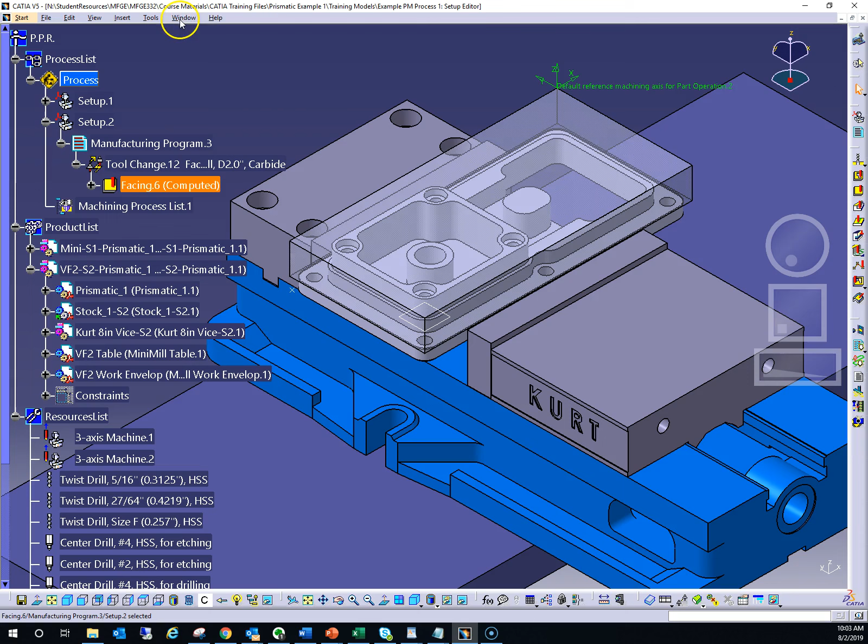The next operation that we're going to do is a profiling operation. So if we look at what that might look like, this here shows you can see in green here what we want the surface we want to generate. In other words, we're trying to remove material on the outside of this using a profiling operation.

So there are a couple of things to bear in mind when you do a profiling operation. We've talked about this in an earlier video. I'm going to go ahead and hide that green surface. I'm also going to hide the stock temporarily.

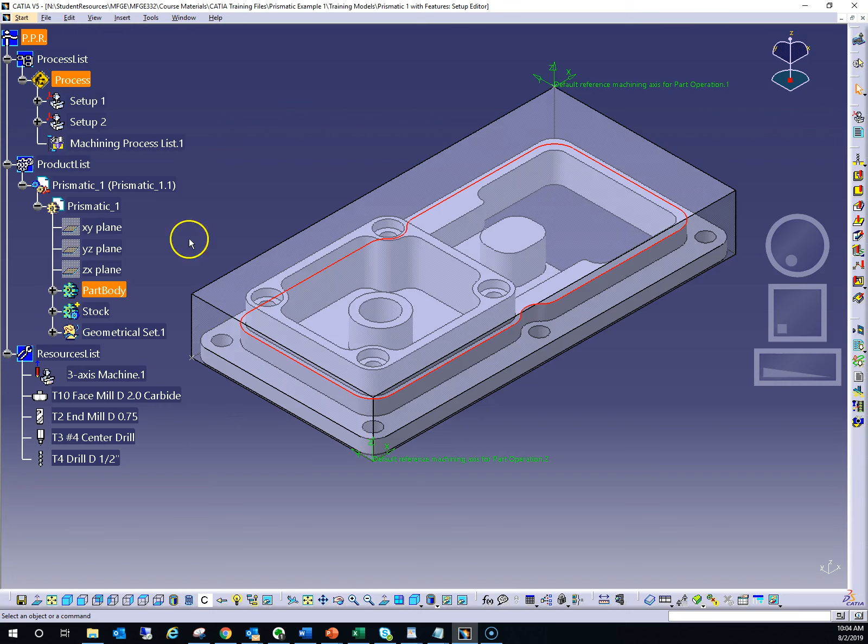One of the things we mentioned is we need to look at areas where the cutter goes into a concave region to make sure that the cutter radius is appropriate. So we use the measure tools here to measure. This tells us that we have a radius of 0.436. So a cutter diameter of 3/4 of an inch would work in there.

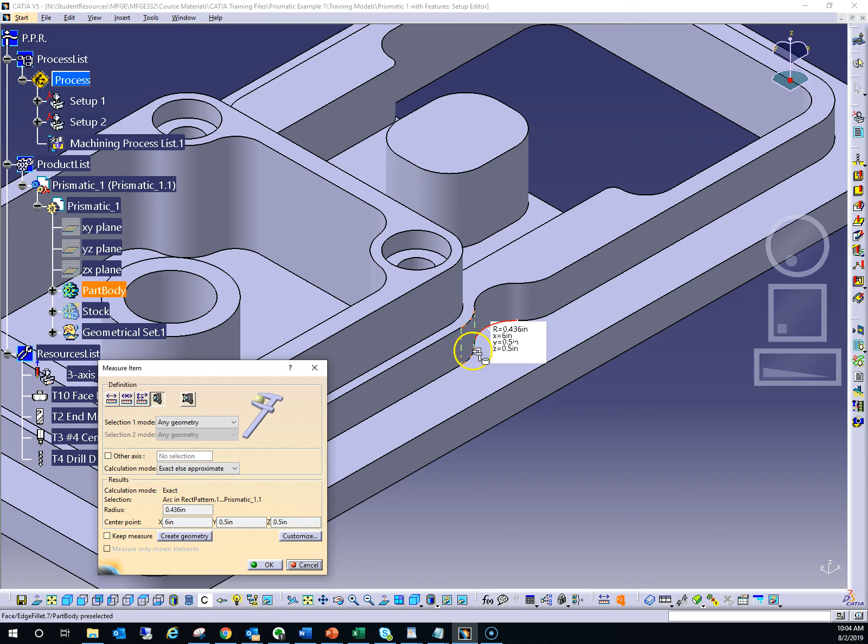The other thing we want to pay attention to is how much material do we have this way, because we're not going to be able to take all this material in a single cut. We have to use multiple radial passes. So I'm going to measure the distance between this face and this face, and it tells me that that's 5/8 of an inch, or 0.625 distance.

So that gives me a little bit of information about the size of the tool, and also too, for my machining toolpath strategy, how much of a step over can I take, and maybe how many passes do I need to take radially to remove that material.

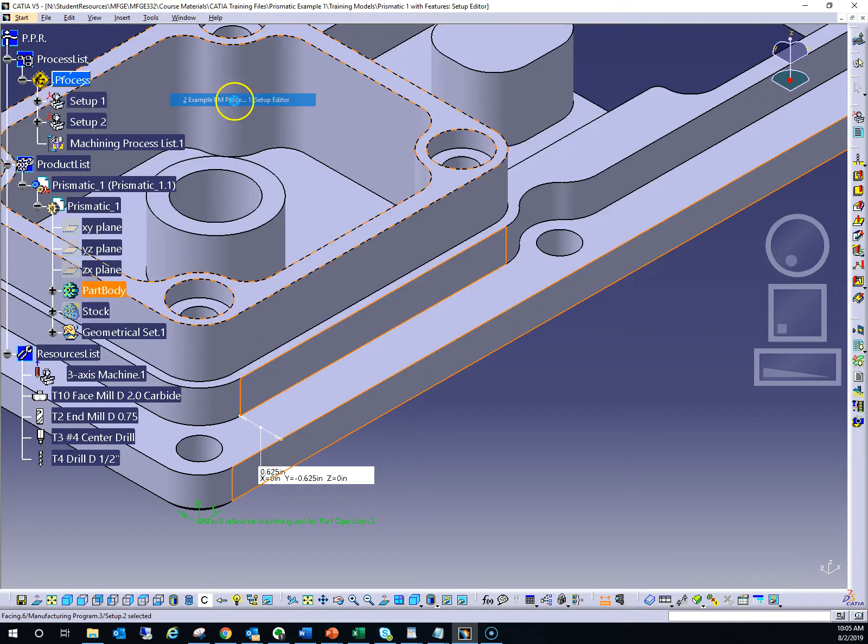Okay, so with that, we're going to go to our setup, and we're going to just jump right into this. I'm actually going to let you go ahead and do this as an exercise first, since you've already done a profiling operation in the first setup.

So here is what we did for the first setup. Using the same parameters, the same cutting tool. In the first setup, if you recall, we used a 3/4 inch end mill. So we're going to work with a 3/4 inch end mill, of course, that will work in the corners. So using the same tool, the same approaches and retracts, and also the same speeds and feeds and toolpath strategy.

So I'll let you take a shot at this first, and then we'll come back and you can look at how I've done it, and you probably need to make some changes to some of your choices once you've done that.

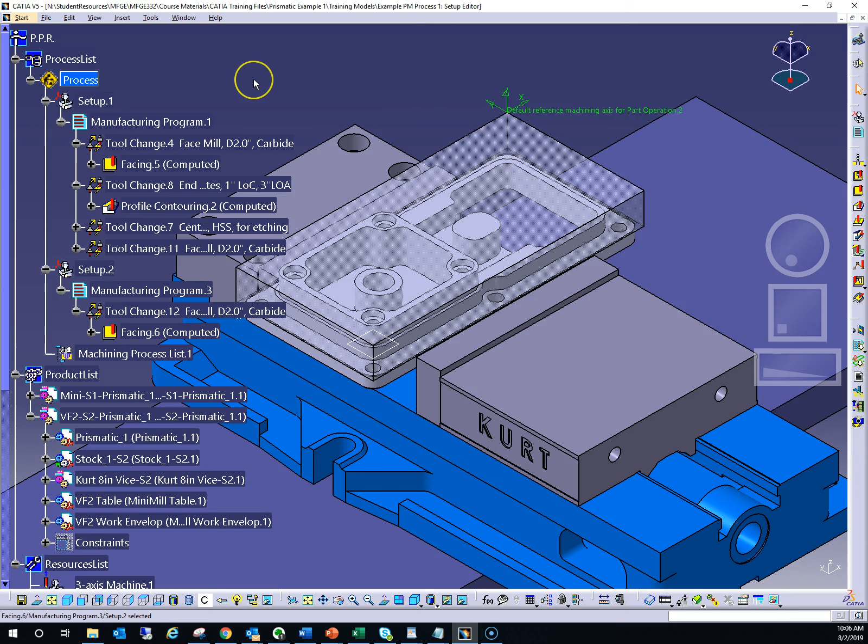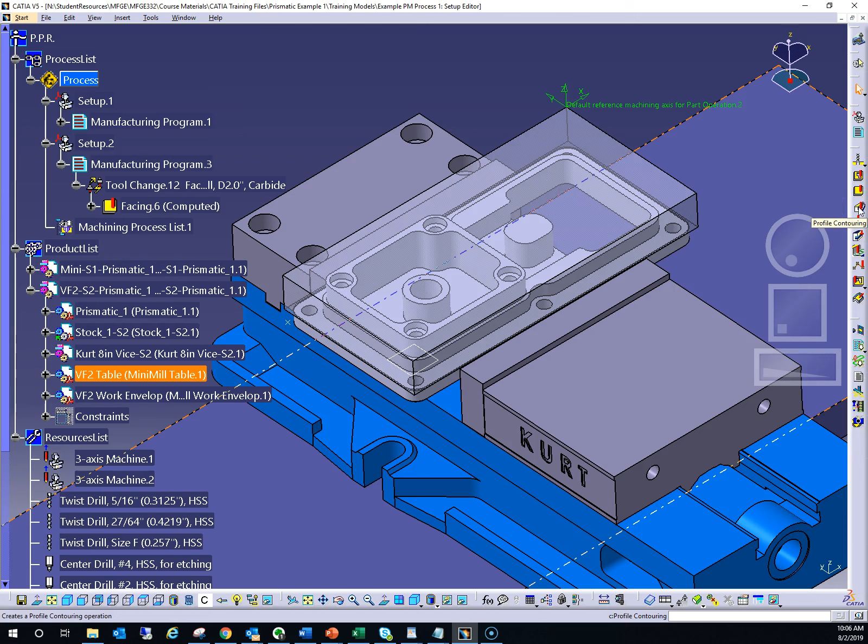Okay, so hopefully that went well for you. Let's go ahead and step through the process of adding that operation. Again, we're going to add it to our second setup. So we go over here to our operations toolbar, and we select profile contouring, and we add it below the facing operation.

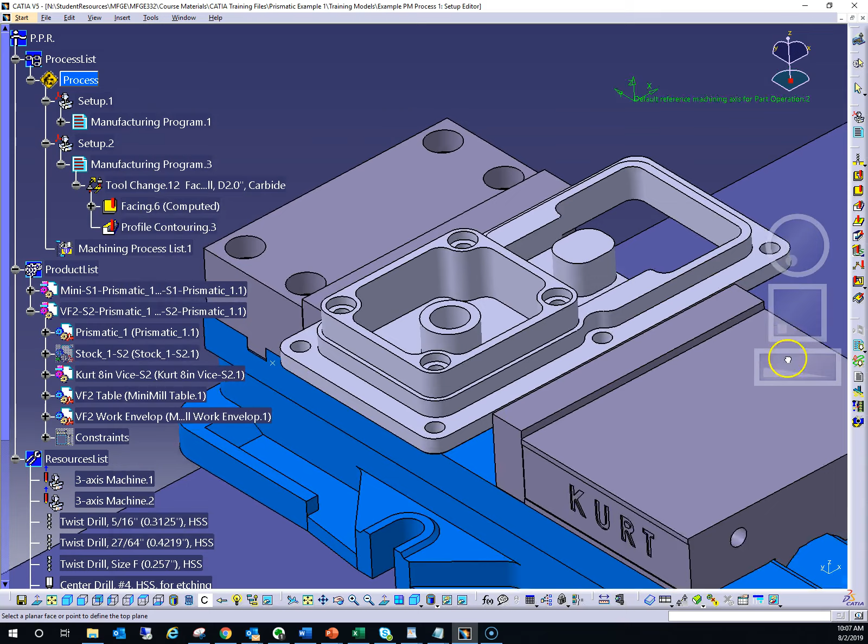The first step is to go ahead and define the geometry. So to do this, I'm going to hide the stock because I don't really need the stock, at least not initially. So let's go ahead and hide this. The first thing we pick is, where does the tool first hit material? Remember, we faced off material down to this surface, so this is where the tool will first make contact.

And then we want to go ahead and select the guiding elements. That tells us what the profile is that we want to machine to. So let's go ahead and select this. And again, I'm going to use the edge selection tool.

So if you remember the edge selection toolbar here, we can go ahead and select an edge. And previously I showed you that once you select an edge, you have some of these tools that help you select a loop or multiple edges. So in this case, I want to use the option to navigate on edges until an edge. And then if I look at this arrow here, it says that CATIA is going to go around. It's going to actually select edges in a clockwise direction.

So let's go ahead and select this edge here. My hope is that CATIA will be smart enough to loop all the way around and come back to this edge here. So let's see what happens. It looks like it got to this point here, so it didn't quite get all the way around. It got confused at this point here. So let's repeat this and see if we can get back here. I'm going to click on this again, and hopefully I can extend the selection all the way through.

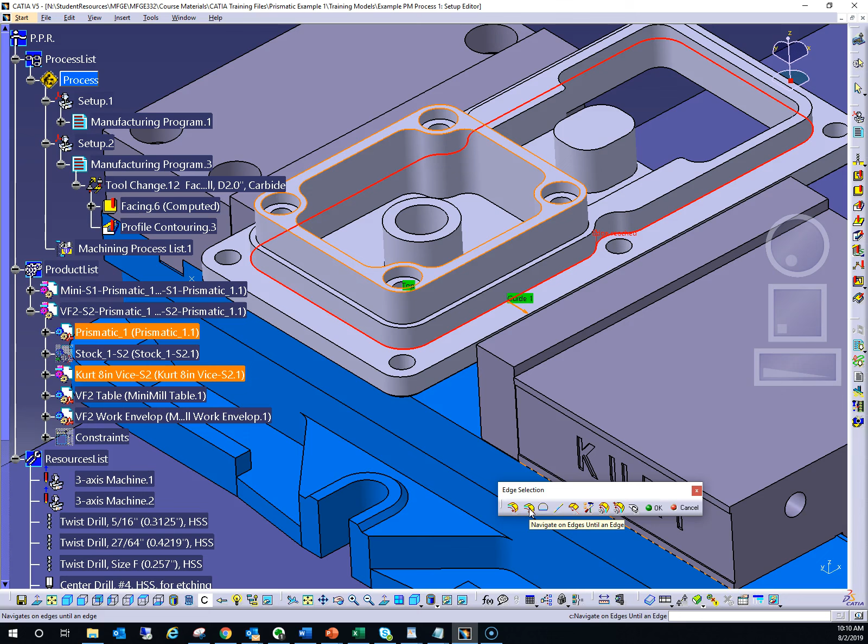So there you see I can very quickly pick a lot of edges without having to go through and manually picking each edge individually by using this navigate on edges until an edge. So let's hit OK. We now have our guiding elements picked.

Let's go ahead now and pick the bottom. This is a pocket profile that has a bottom, so the tool will ride on the surface. Let's select that as our bottom. And these are limiting surfaces - again, we don't have any limiting surfaces since it's a full circuit that the cutter is going to do. Okay, so this is our geometry.

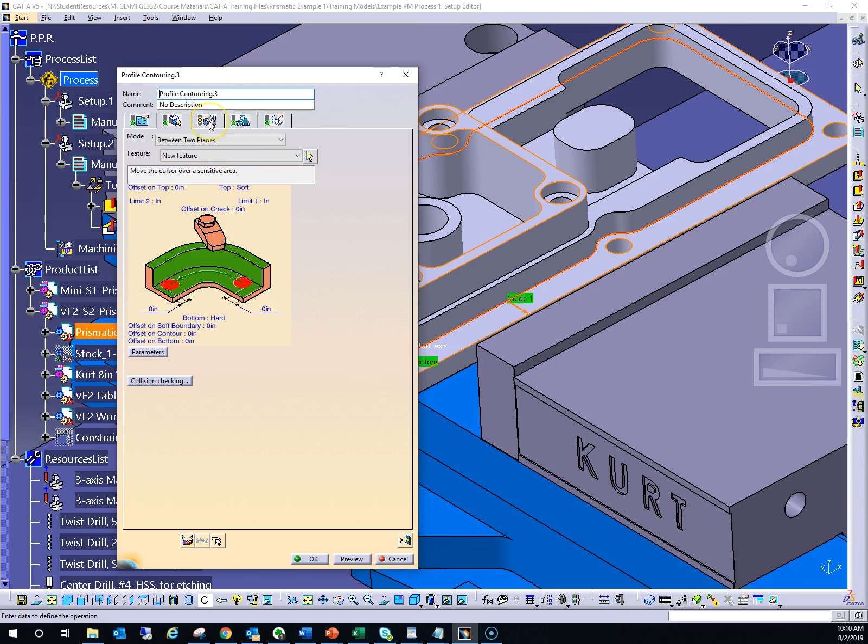Let's go to the third tab. It looks like CATIA is trying to use the facing cutter. Of course, that's not correct. So let's go ahead and change the tool that we want to use.

So let's select the tool from the document. In this case, we're going to use the 1/2 inch carbide three fluted end mill, which is the same tool that we used in the first setup. So let's go ahead and select that.

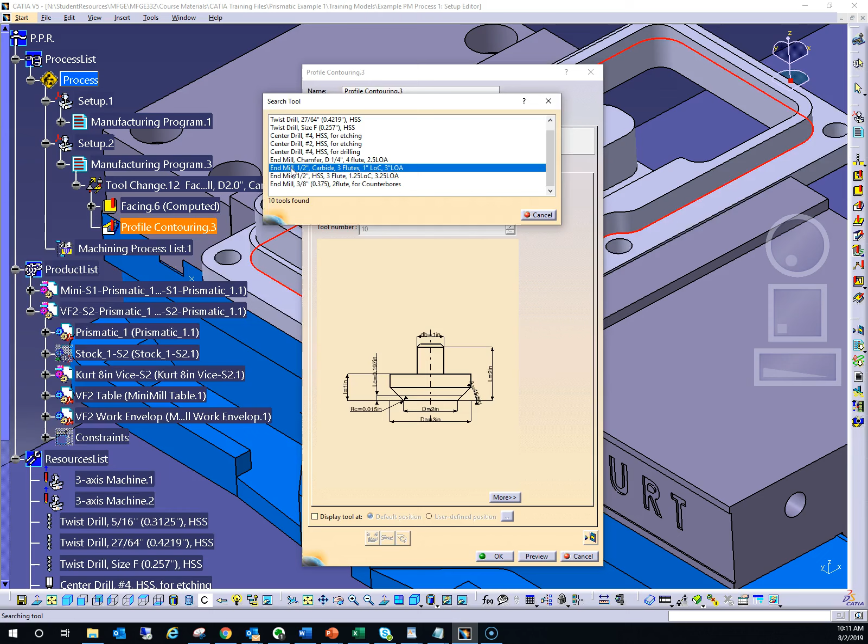We can see that in selecting that tool, CATIA actually took that profiling operation, which was previously being machined as part of the facing cutter tool change. It inserted a new tool change for that end mill, and now it's added the profiling operation under that tool change. So that's our tool selected.

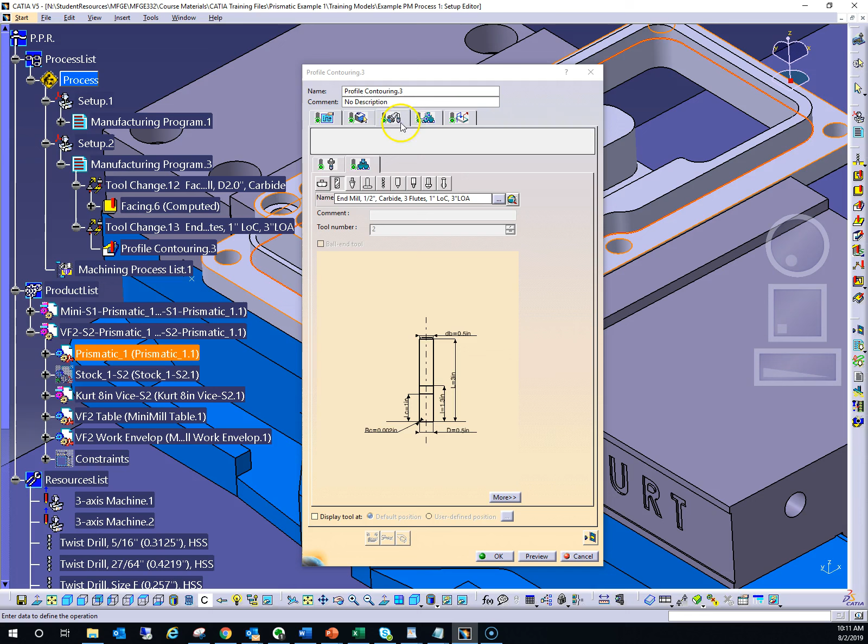Let's go over now to our fourth tab, which is our process parameters. We want to make sure here that we have the right information. So this comes in from the cutting tool, the machining roughing feed rate, which is 120 inches, and our finishing feed rate, which is 20.

The approach and retract look like the values that were set for the facing operation. CATIA remembers these - we're going to stick with those. Then our RPM is 6,000 revolutions per minute, which is what we use for carbide. So these look good. Let's go over to our

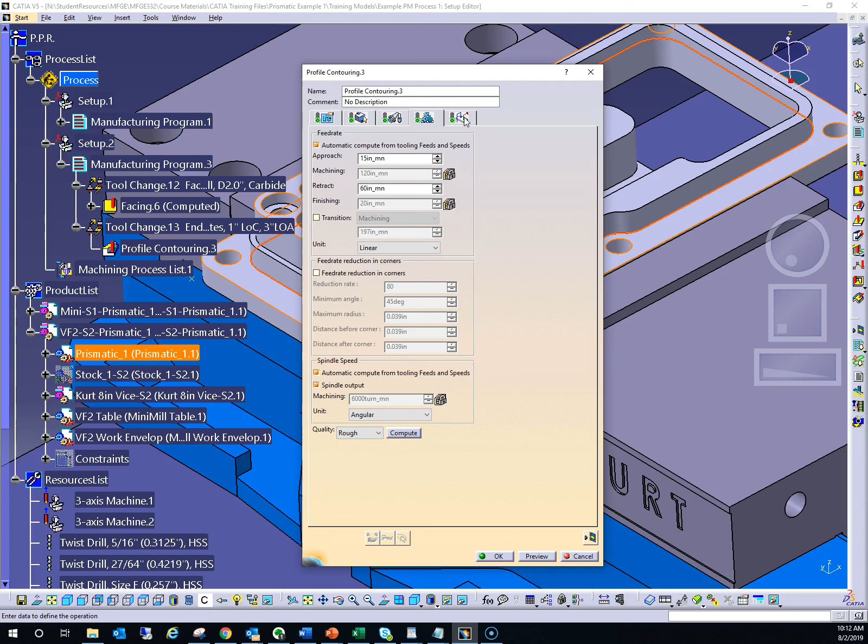Fifth tab, and these are our approaches and retracts. If you recall, in the first profiling operation in setup 1, we used a circular lead-in and an axial move for our approach retract, as well as return between levels because we were stepping down multiple levels to get down to our depth of cut, and we also had a finish pass, retract, and approach. So let's activate these just to remind us that we have to do these.

Let's start with our initial approach. We want to do a circular lead-in and an axial move. This is a move from a plane, so we want to delete this. Let's remove all motions, and let's go ahead and add a circular motion. We left the default radius - again, you can change this if it's too long, make it smaller if you need to.

And then we added an approach move, axial approach move to the start of the circular lead-in. So we use this axial move here, axial motion. Now, if you recall, in the first setup for that profiling operation, we used 0.125 as our axial. Again, the rule of thumb is that you should use an approach motion axially that is slightly greater than the depth of cut. For the profiling operation in the second setup, we're probably going to have to take fairly large radial passes.

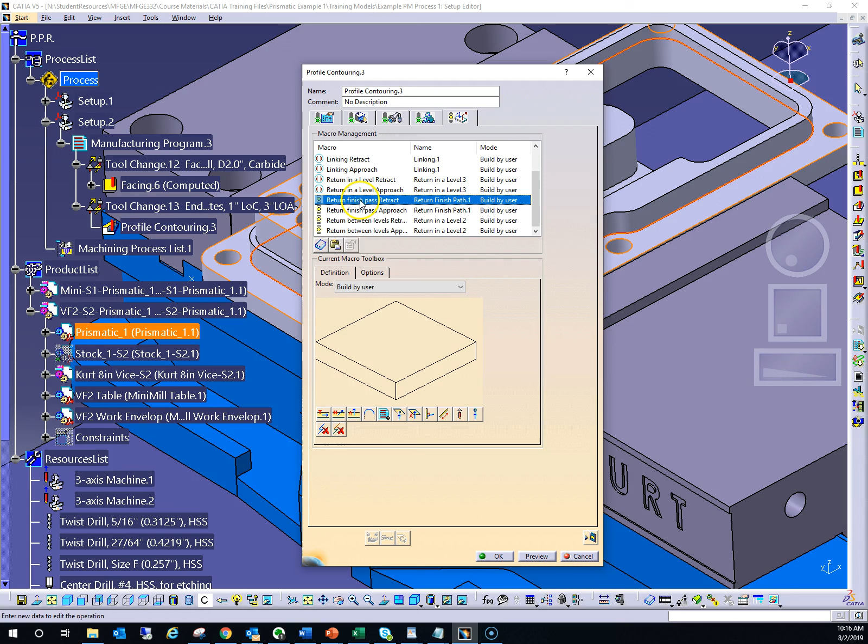So that's our approach, and we're going to just do the same thing for the retract. We're going to delete what's there, add a circular, add an axial, and then double click and make this 75 thousandths. Again, we can come back and change these if they do not look to be correct. Let's just repeat this for the finish pass retract, the approach, and then the return between the levels retract, and the return between levels approach.

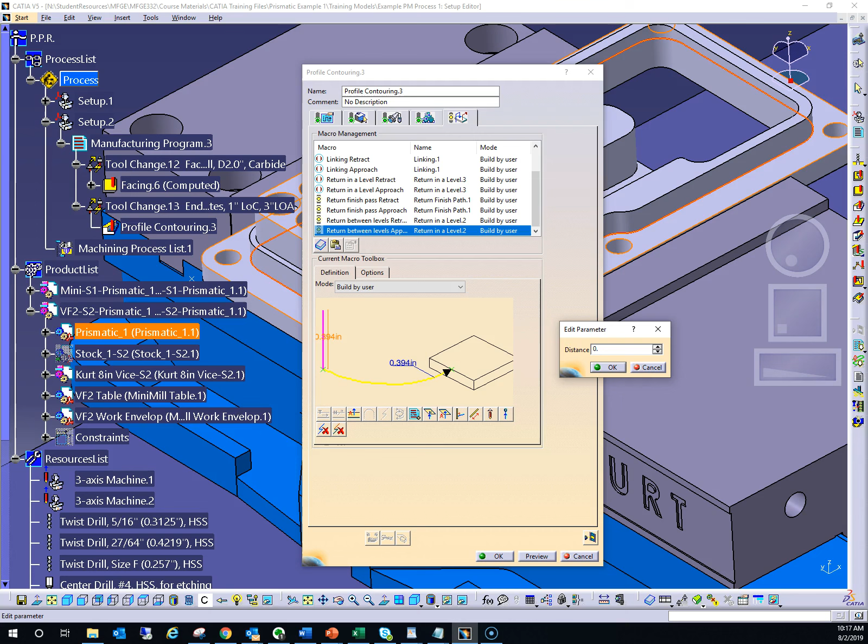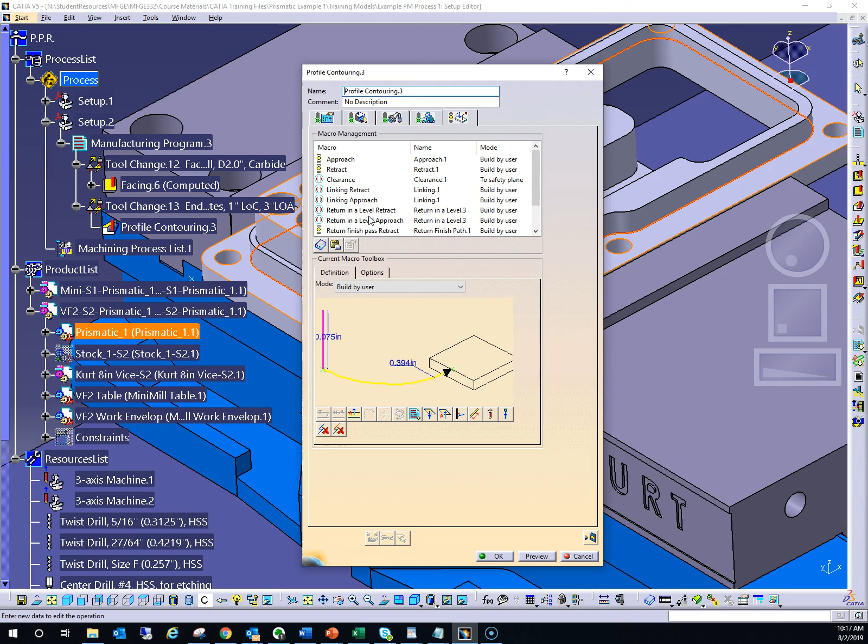Okay, so we have the initial approach retract, and we've activated 2 other pairs. We may have to also do something else on here, but let's move ahead first. We can always come back and add these later once we see what the tool is doing as it engages the material. So let's jump now over to the first tab.

In here we're going to use a one-way strategy as we did in the first setup. We're going to leave the direction climb, type of contour circular, which is going around corners. Again, we don't have sharp corners here, because they are rounds on the corners and fillets.

If we look at these options here, we do want to close the toolpath. So let's close it, and let's do a little bit of an overlap, 50% of the tool. That's fine. The remaining options are not important here.

For step over, remember there are 2 types: radial and axial. For the radial step over, the question mark will explain what this means. We have a question here of how many paths do we want to use. So remember, when we measure the distance between this face and this face, we found it to be 5/8 of an inch. And if you recall our cutter diameter, we're using a 1/2 inch cutter.

So there's no way we can take this in one radial pass. And even if we could, we may not want to, because of the cutter load. So we need at least 2 passes here. This question mark shows you. So let's bump this up to 2. And then the distance between passes, since we have a 1/2 inch cutter, let's go with 50% radial engagement, so let's use 0.25.

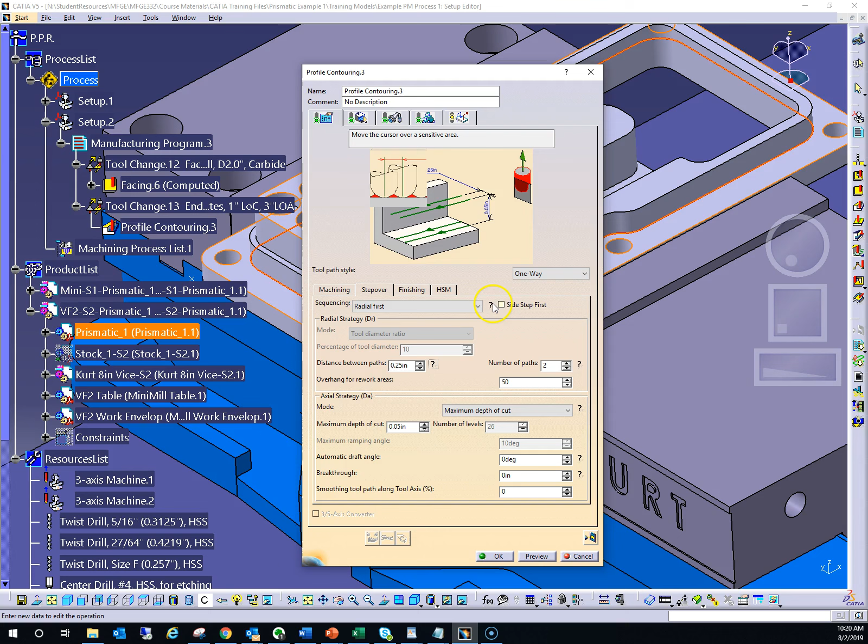And then we want to adjust our axial. So this is how the tool changes depth. Again, the sequencing here, just to recap, I stepped over this. The question mark shows you that we're going to go radial first, so we're going to cut 1, move to 2, then 3, 4, 5, 6. So this was set correct.

So for our axial strategy, we want to go maximum depth of cut of 50 thousandths, and this tells you the number of levels. So CATIA calculated the number of levels given the distance from the top of the profile geometry to the bottom. So it's quite a few levels that have to be cut at 50 thousandths to get where we want to get.

So these other options here are not important for what we're trying to do. Let's go over to the third tab. We want to add a finishing pass at the last level and bottom.

So what this means is that we're not going to finish each level. Remember, we have 26 levels, so it would mean a finishing pass would be added to each one of those 26 levels if we were to do side finish at each level and bottom. We just want to do a finishing pass on the side when the tool is at its lowest level, and then also to finish the bottom too.

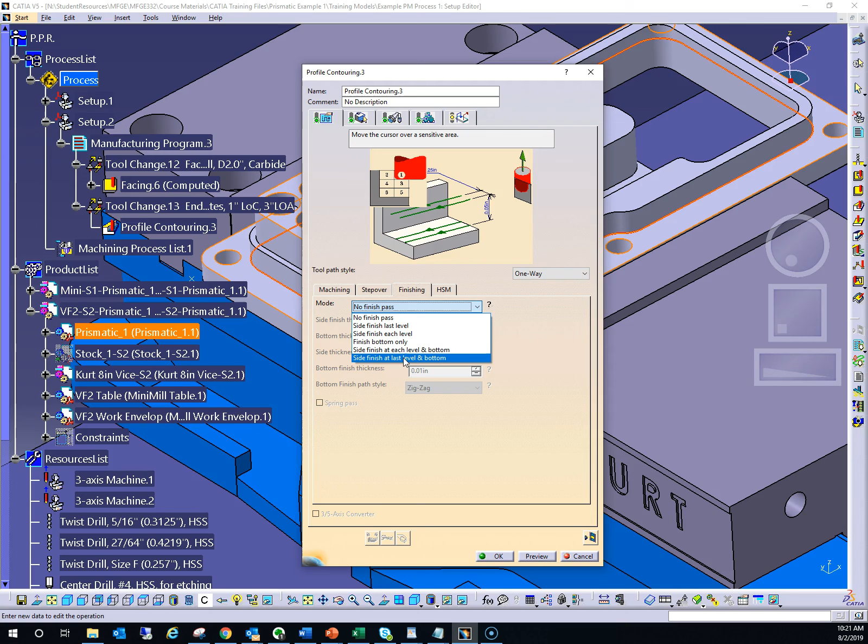And we want to have a side finish thickness. Again, the question mark shows you what this is, so this is how much we're leaving. And we're going to set this to 10 thousandths.

Some of these options here are for other things you might want to do, but the one we want to set is the bottom finish thickness, the top one and the bottom one, and that's already at 0.01 or 10 thousandths. Okay, so let's go ahead and generate our tool paths.

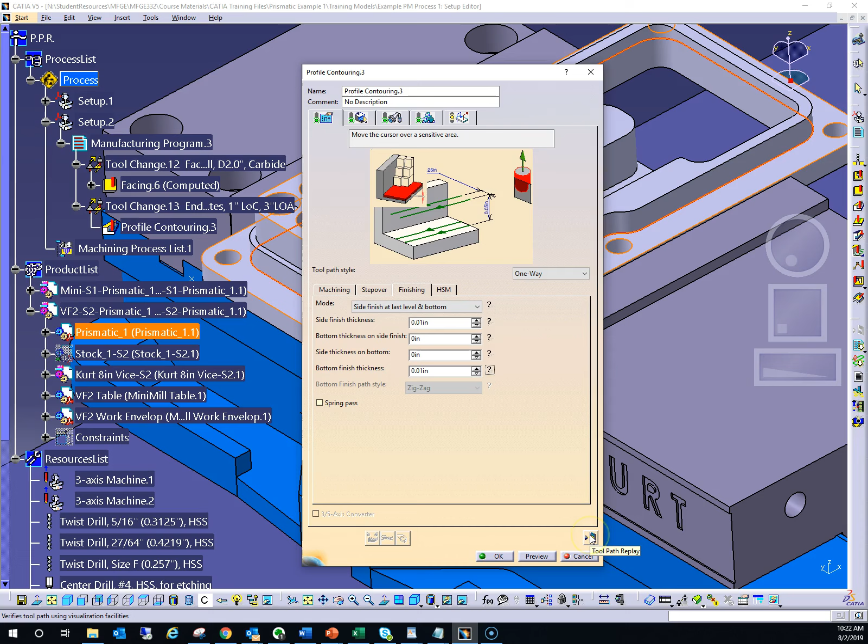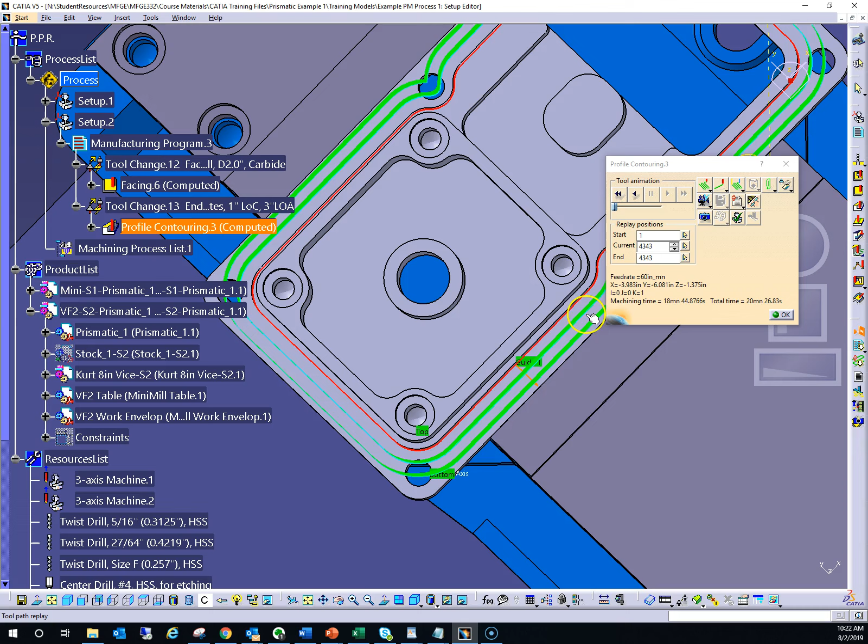And there we go. So what you can see here is that the cutter is taking 2 radial passes. The cutter starts on the outside, and then it moves inwards to the next pass. And once it's got these 2 passes done at each level, it drops downwards.

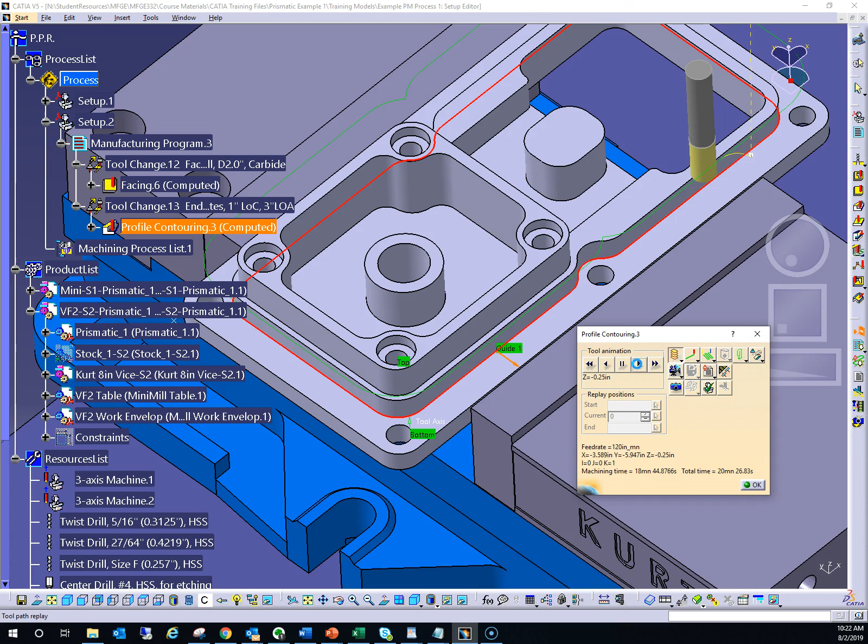If you change your toolpath display option to plane by plane, and then rewind, you can see clearly what's happening on each level. So as we step through, we're now seeing what each level does. This here shows you the initial approach from tool change, this dashed line, tool stops at 75 thousandths. Remember we set our axial approach in our macro to 75 thousandths.

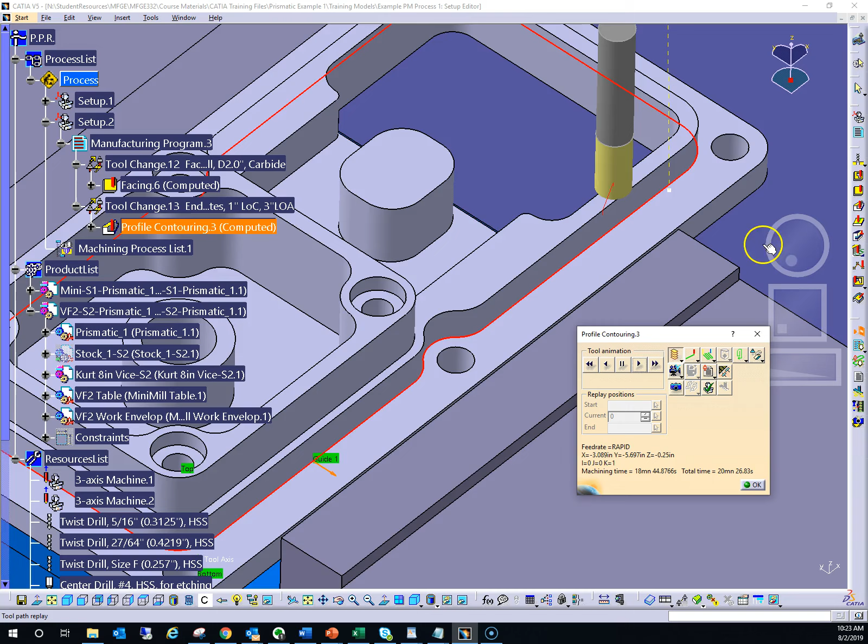So it approaches at the approach rate, and then it moves into a circular lead-in. Then the green is the actual machining at the machining feed rate. So that's the first level. Then once the tool gets to the end of the first pass, it now repositions to do the pass that's closest to the final wall that we want.

So the tool rapids up, rapids over, and rapids down. Now this is a little bit concerning, and we may want to tweak this in a little bit, as I will show you. But let's continue. So now the tool completes that inner pass. So it runs all the way around the second pass.

The tool comes out, so this is the retract move. And now it repositions down to the next level. So this is the tool retracting, rapiding, and now dropping down to the level that's 50 thousandths below the first. And then pretty much it repeats. So here's the lead-in again. The circular lead-in runs around the part.

Then it repositions to the second pass radially, the one that's closest to the wall. And then it does that pass, comes out. So this is the retract between levels, because this is how it gets to the next level. It comes out, it retracts 75 thousandths, rapids over, rapids down, and engages 75 thousandths.

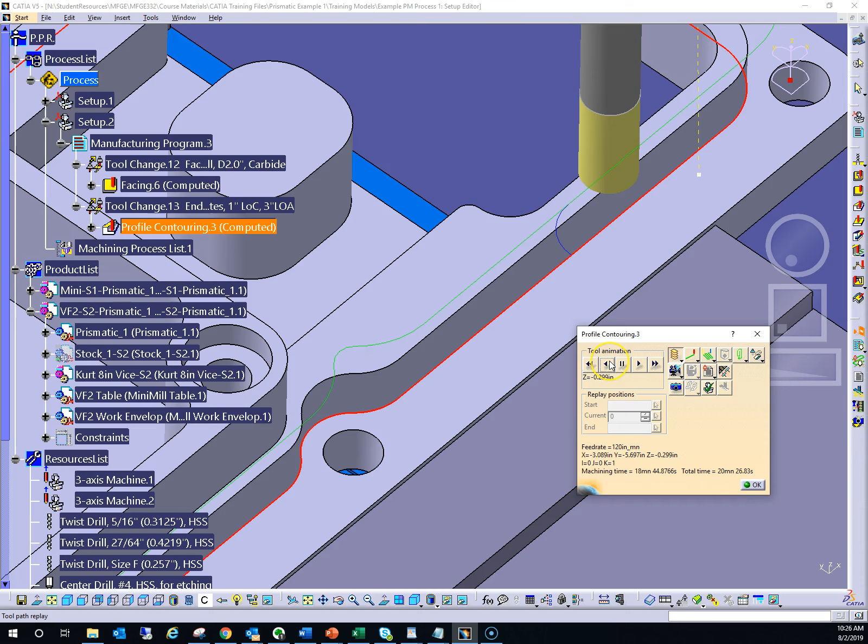So again, I strongly recommend you use this plane by plane option to look at what's going on. This is the way you visualize how the tool is removing material at each level. Now I'm going to step back a bit because there was an issue here, which shows how the tool repositions between the outer radial pass and the inner radial pass. Remember that we've set it to be 2, and this is done totally using rapids.

So this is a little bit concerning. Anytime you rapid up and then rapid down, and notice that there isn't any yellow here. So the tool is rapiding down to this toolpath. So that's of course a danger sign. Anytime the rapid stops on your green means that the tool is rapiding into material down to your depth of cut. So we need to fix this. So the question is, what macro or what lead-in or approach and retract impacts the tool as it moves between parts of the toolpath at the same level.

So let's hit OK, and let's go back to our 5th tab. And it's probably one of these options here that has not been set. So if we look at these options here, we see that there's something called return in a level retract, return in a level approach. And what this means is, how does the tool approach when it moves from one piece of the toolpath at the same level to another piece of the toolpath at the same level. So we want to activate these two, and again they activate as a pair.

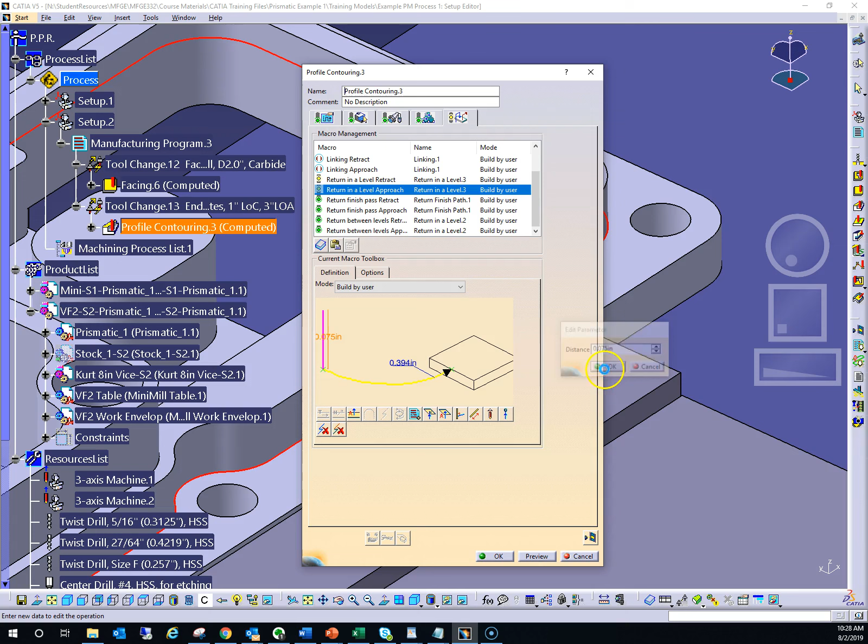And let's go ahead and just set these to be the same as we did for the return between the levels, which is we had a circular lead-in and then an axial motion that is greater than the depth of cut, so 75 thousandths. And then let's do the same thing for our retract. And let's look at what impact that had. So now that we've added these, let's go ahead and regenerate our toolpaths.

So it looks a lot busier in here. And let's rewind to the start, and let's step through. Make sure that you're on plane by plane replay. So again, this is the first approach. So this is the outer pass. So we come around and then we retract. And now the tool is going to reposition for the inner pass. So that's the one that's closest to the wall.

And we see now that instead of it being fully red, we now have a blue retract. We have a red rapid, and now we have this yellow here, which tells us that the tool is moving downwards at the approach feed rate. And now we see for the inner pass, we now have this yellow approach, which we didn't have before. And the tool then moves around in a clockwise direction and then comes off.

So this is basically what's happening on the first level, 50 thousandths down. This first pass on the outside radial, and then we step in, we complete this, step in, and then do the pass that's closest to the surface that's being machined.

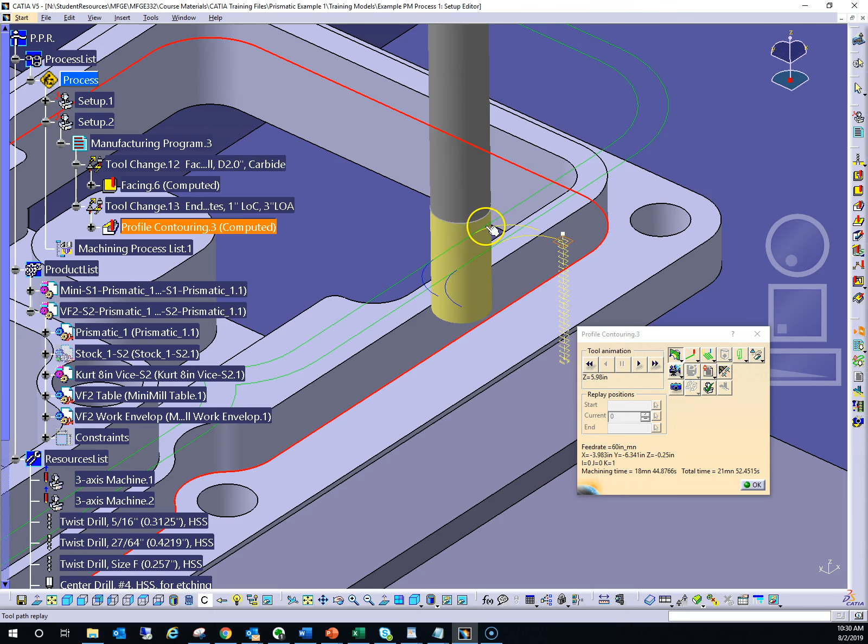The other thing that you may want to check is the finish pass. So another display option that's really useful, instead of the plane by plane, you can come down here to the bottom and look at what's called sectioning of tool paths. So let's click on this. And what you see displayed here are all the levels that tool paths have been generated on. And by clicking on one of these levels, you actually see all the tool paths on each level. So again, you can see the two passes, the lead-in in yellow and the lead-out or retract in blue.

So what we want to do is look at the last level, because the last level, of course, would be our finishing pass, just to confirm that we have the correct lead-in and lead-out. So if we click on that very last yellow plane here, we have our yellow lead-in to the light blue. The tool comes off, and then it lifts up and repositions over here for the second pass and completes the second pass.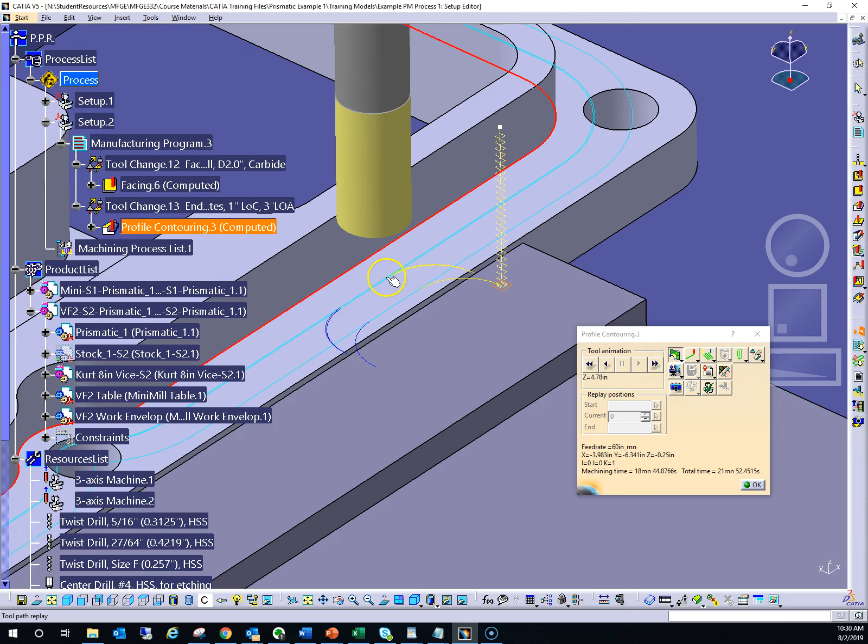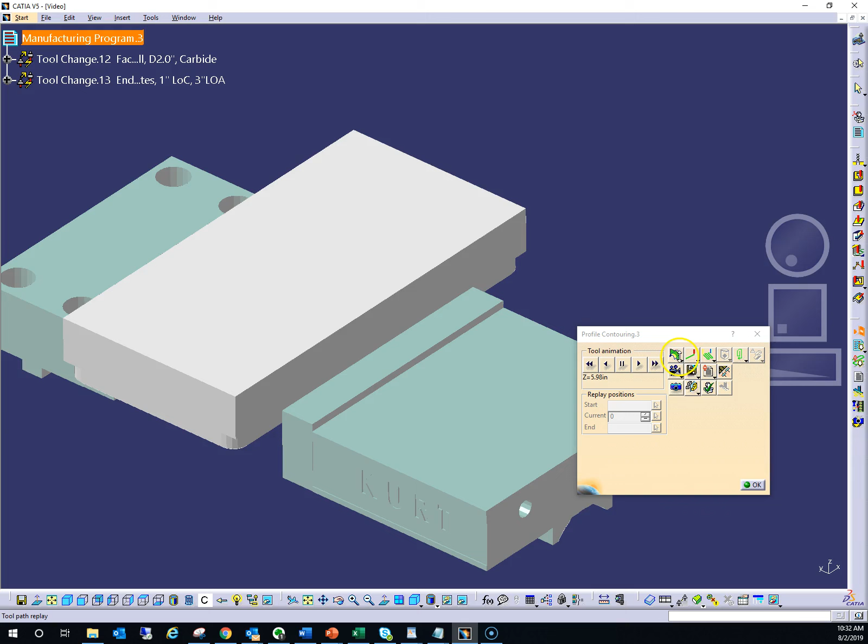Okay, and we have, of course, the option to do our replay using material removal simulation. And this might be important to check and make sure we're not leaving any material in the corners. So let's go ahead and run this. Sorry, we have to switch this to continuous playback. So there's our facing operation. So we are in fact leaving material in the corner, which is something that we're going to have to deal with. So there we go. We're also leaving material here.

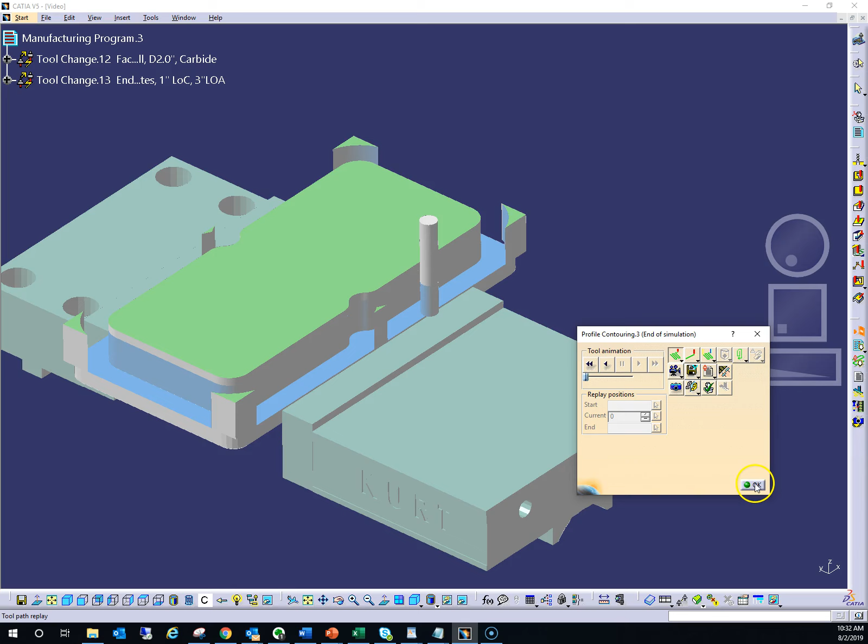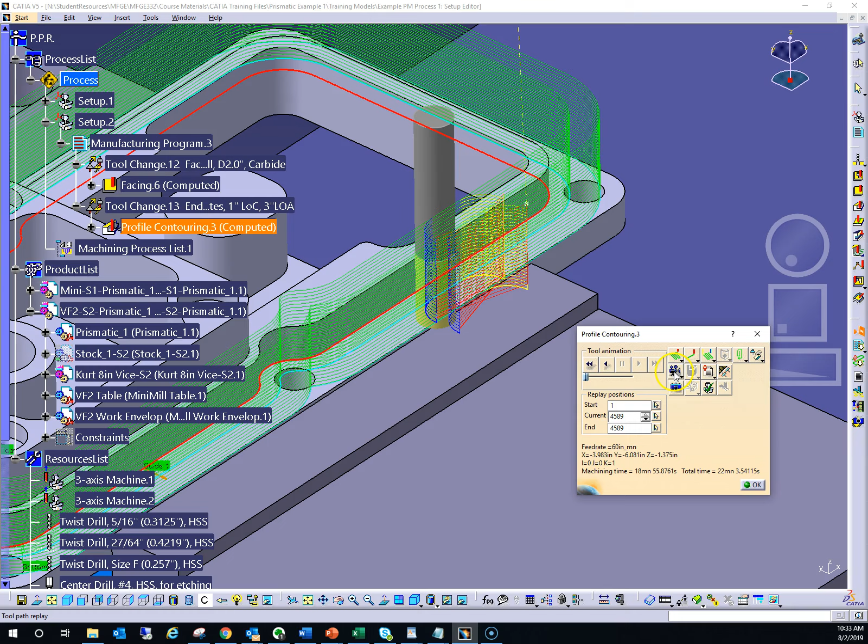So there are a couple of strategies one can use, and we would probably not get into those fully in this video. But one thing we could do is we could go back to our strategy tab here and change our step over. So remember, we have 0.25, a quarter of an inch between tool paths. So let's say we wanted to increase this outwards to 3/8. Let's go ahead and generate. And let's repeat the material removal simulation. So we removed this, but we're still not quite there on the corners. So that remains an issue.

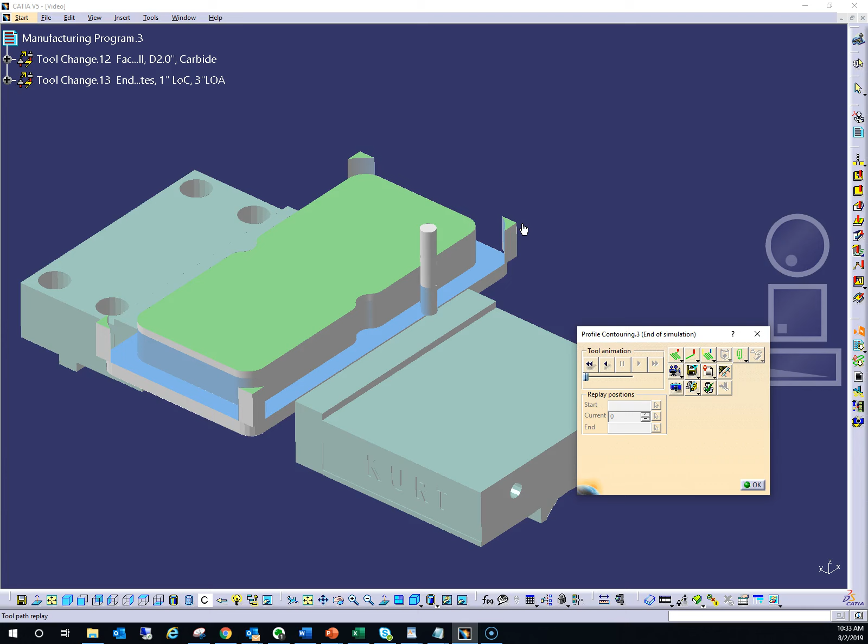So what are the options? Well, one could increase the size of the cutter. So if you went from a half inch to a 3/4 inch, you'd be able to take a wider path, and that could potentially do it. The problem with doing that, though, is that we tend to want to avoid using larger cutters because if you have an accident with them, they tend to do a lot more damage, and they also cost more, of course.

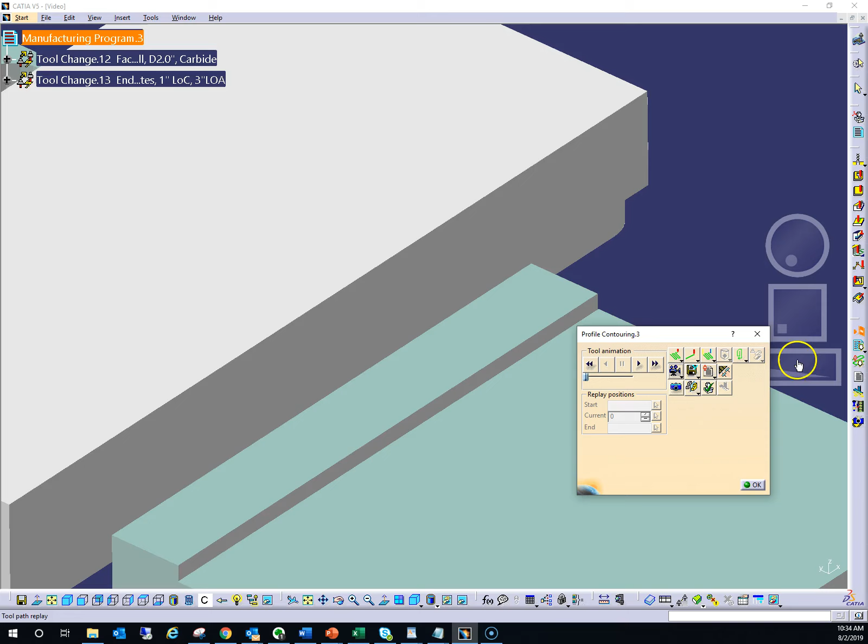The other thing that one can do is one can increase the number of passes. So instead of 2 passes, we can use 3 passes. Let's change this back to a quarter of an inch. So this, of course, is going to increase your time. So now notice that there are 3 passes here instead of 2. Let's look at the simulation. So again, it's still leaving the corner. So let's go ahead and pause this and close, hit OK. And let's go back to 3/8 of an inch.

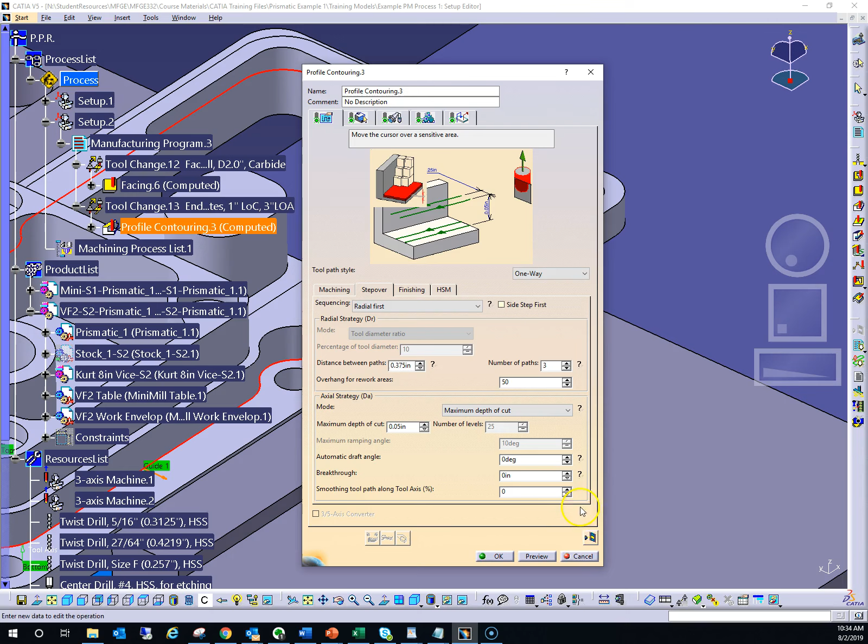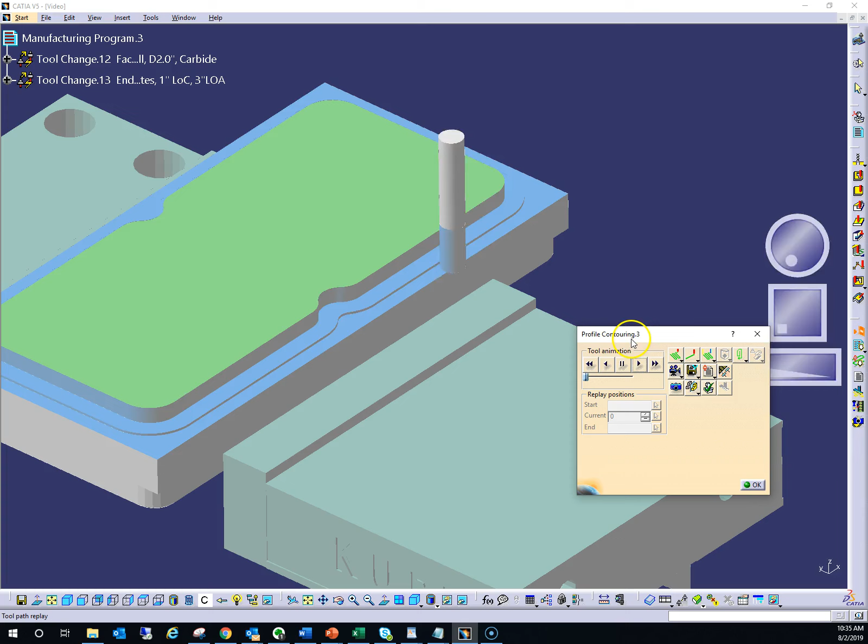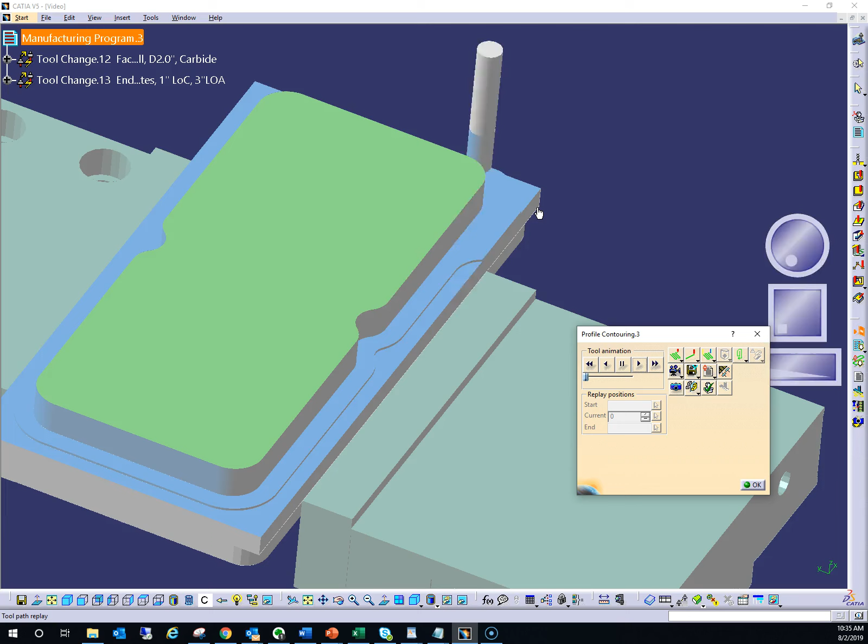So now we are getting the corners, but notice if you look closely, let's just pause this here for a second. Notice that the cutter, as it's going around the first pass, it's hitting the corners correctly, but it's not doing any work here. So this is really inefficient because remember, we're doing this at 25 levels. So while this is certainly going to give you the result, when you talk about your machining time, it's going to be less efficient from that perspective.

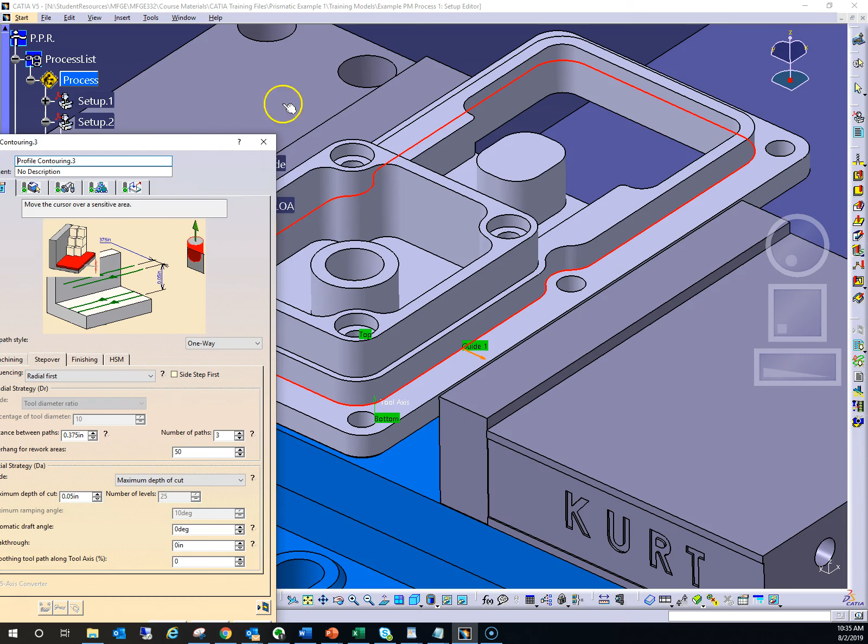There are, as I said, other strategies. You can increase the size of the tool. The other thing you can do is, when we talk about pocketing operations, you can add a pocketing operation to clean out corners. So having four operations that do those locally so that the tool focuses in these regions, and then you can maybe get away with 2 passes. And at the end of the day, it all depends upon the machining time which one comes up with.

And the machining time is depicted here. So we can see here that it's going to take quite a bit of time, almost over half an hour, to machine all these passes. So again, there's that consideration of the time to do this that needs to be brought to bear.

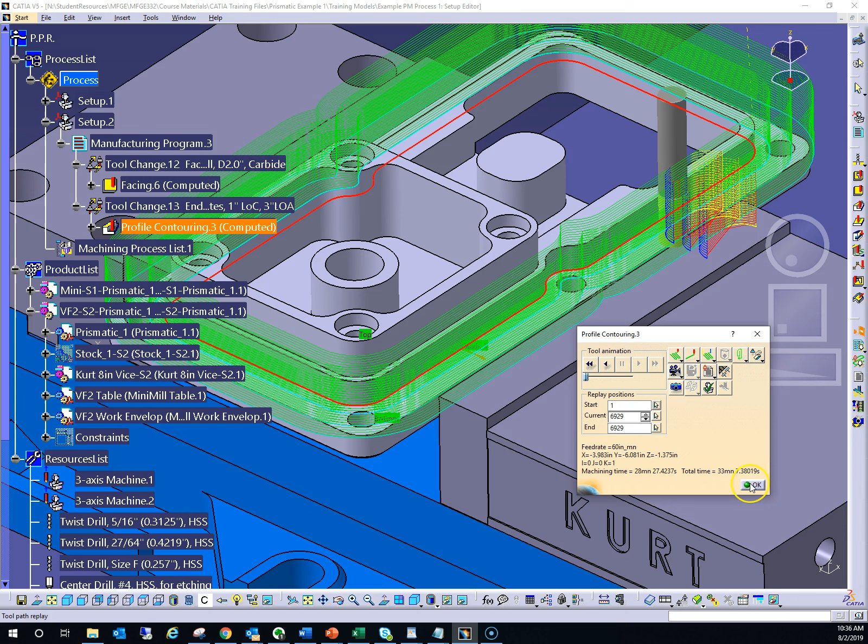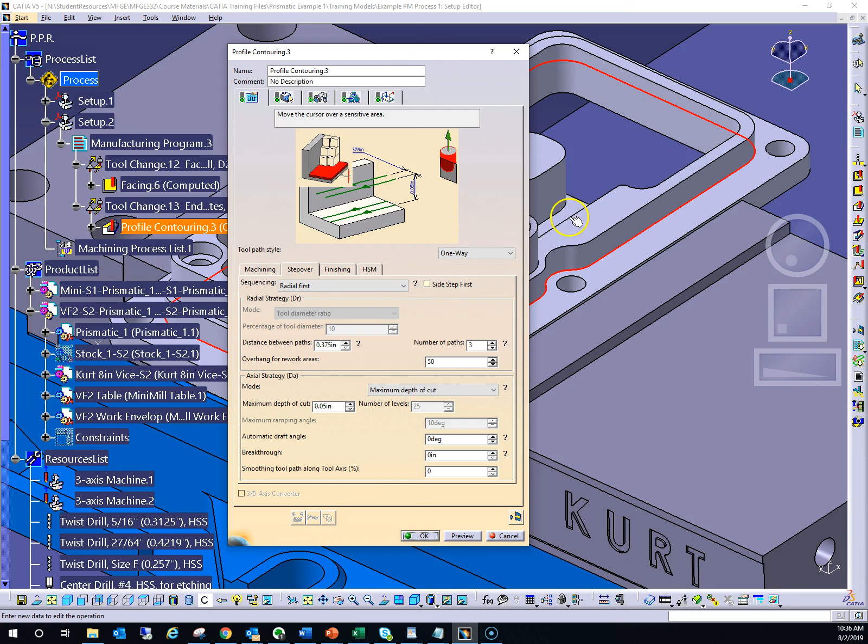Okay, so again, this is how you would set up the profiling operation on the second setup. Very similar to the first setup, however, there were some other additional considerations, the number of passes that we needed to take being one of those. And in the next set of videos, we'll start looking at how to do the pocketing operations. Again, hit OK to commit it to the tree. Do save your file as you progress through these videos.